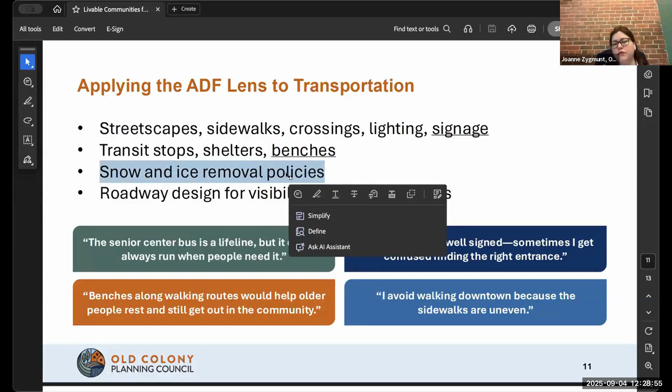So benches come up a lot—needing more benches on sidewalks or other major paths that people might be taking. Snow and ice removal policies—I know we've all got them in our communities. They become much more important if you're looking at a community through the perspective of age-friendly or dementia-friendly planning.

As you can see from some of these quotes: somebody avoids walking downtown because the sidewalks aren't even. Similarly, I remember in one of our focus groups, a woman said, 'I don't go out in the winter because everything's icy and slippery and not cleared for me.' So it really does impact quality of life for folks.

And then roadway design for visibility and slower speeds—I think that's an obvious and super important one.

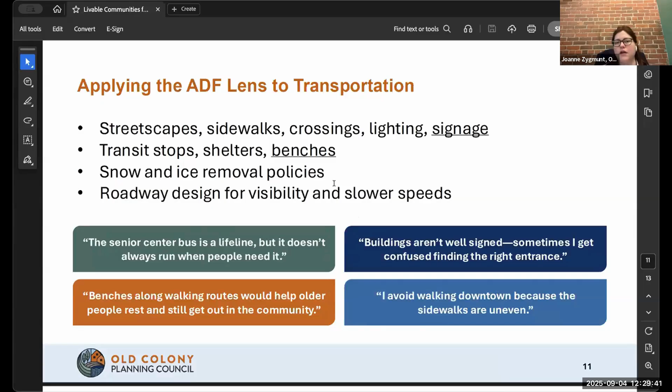AARP, and I'll include a slide at the end with resources, and the Dementia Friendly America organization have a lot of resources that help you look at transportation from these lenses. So we'll point you to those.

As I mentioned, what municipalities can do: aside from going through the process of getting AARP designation, signing the Dementia Friendly America Pledge, and putting together an action plan, many of our communities are moving towards dementia awareness training for municipal staff. For example, this is something that Duxbury recently offered to municipal staff, so they can recognize signs of dementia and know how they might need to respond to their customers, constituents, and residents in different ways to help them progress whatever issue they're trying to resolve.

Integrating age and dementia friendliness into planning, as I mentioned: you don't have to do a separate plan, but you absolutely should include it in all of your planning efforts. Doing a separate plan can also help with this.

Collaboration: we found in the communities we've worked in that sometimes the different municipal departments aren't necessarily coordinating with each other on transportation as a service. So the councils on aging sometimes work well with the DPWs, but sometimes when you talk to the two of them, their priorities might be different, and there needs to be better conversation there.

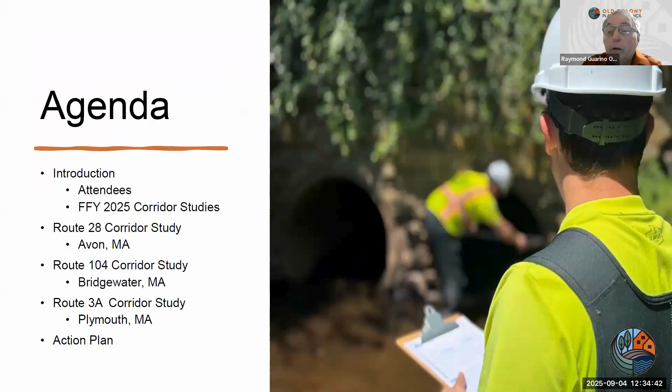Our agenda here is that we're going to talk about the three corridor studies. I'm going to talk about the Route 28 corridor study first. We're at the stage where we're coming to completion of these studies, and I'm going to give a brief presentation on the conclusions and recommendations on the Route 28 corridor study, and then pass it on to Kojong afterwards for Route 104. So I'm starting off with a summary of the TIP projects.

There's two TIP projects in the Route 28 corridor. The Route 28 corridor study consists of Route 28 in Avon, which is 1.7 miles, and we focused on the corridor conditions, operating conditions, and 7 key intersections within the corridor.

There are 2 TIP projects within the study area. The first one involves 2 intersections, Route 28 at Harrison Boulevard and Route 28 at East and West Spring Street. It's at 25% design right now. The other TIP project is corridor improvements from that point, from East-West Spring Street all the way to Randolph Line, and that is not currently moving ahead, although it's been approved by PRC.

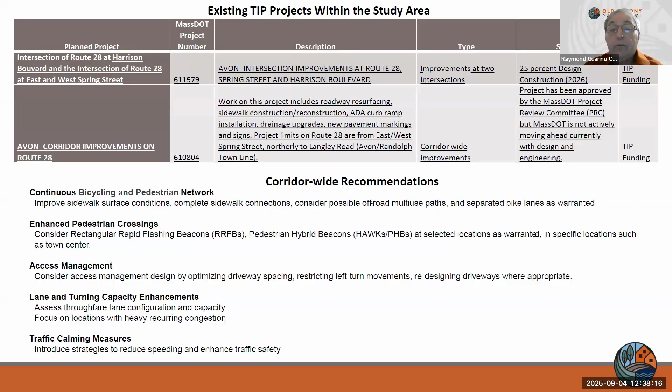So safe walking is very important for transit use, as well as for people using alternative modes instead of taking their car all the time. We found through our survey that on Route 28, a lot of people walk to the Walmart, and we can see worn paths along Route 28 where people walk into it.

Next, please. So I'm going to try to go quickly through each intersection, starting from the north. There were 7 key intersections that we looked at. The first 2 were in Avon Center. The first one was Main Street, Route 28 at East-West High Street.

At this intersection we found poor intersection alignment, and the yellow and all red clearance times are not adequate for vehicles to clear the intersection. There's emergency preemption, since there's a fire station in the downtown, but the emergency preemption is manual, not mounted on the intersection itself—it's actually in the fire station.

There are also long queues between the 2 intersections in the downtown on the northbound side, where people come northbound on Route 28, or from the West Main Street intersection onto Route 28 north, and there's a lot of weaving as they reach the Main Street at East High Street, West High Street intersection. This causes a lot of side-swipe and rear-end crashes during the peak hour as vehicles back up.

The other important issue at this intersection is that there is no protection for left turns on the northbound side, or for vehicles coming from East High Street taking a left.

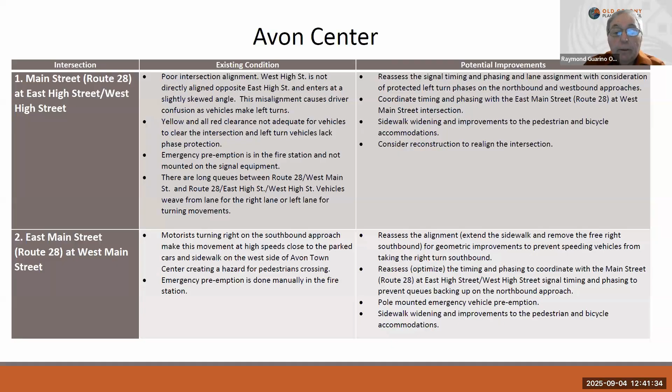So the improvements were to again reassess the alignment, extend the sidewalk—not remove the island, but extend the sidewalk—and remove the right turn to allow for a 90-degree right turn rather than having it cut inside the island close to the sidewalk. And again, pole-mounted emergency vehicle preemption.

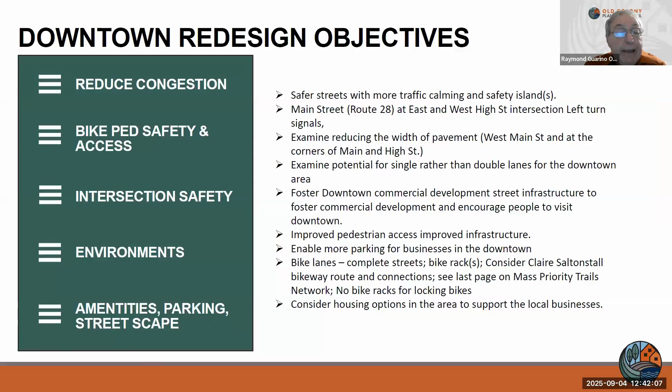Next, please. The downtown redesign objectives: the town had a consultant do a preliminary concept for redesigning the downtown, and the objectives were to reduce congestion, improve bicycle and pedestrian safety and access, improve intersection safety as I discussed earlier, and keep the parking while adding to the streetscape and amenity. Next, please.

And parking actually would be kept because on that side, on the west side of Route 28 in the downtown, there are businesses there that the parking is very important to them. Next, please.

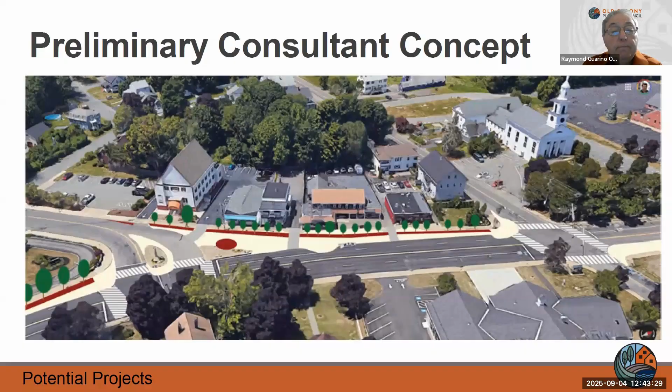The other 2 intersections as we go further south, East Main Street, which is Route 28 at East-West Spring Street, and East Main Street at Harrison Boulevard. That was the TIP project that's currently at 25%. The important issues at these intersections is that East Main Street and Route 28 at East Spring Street and West Spring Street used to be on the top 200 crash location list in 2021.

And the improvements that are going to happen is that it's going to be signalized, and that's going to be coordinated with the Harrison Boulevard intersection. They're going to reconstruct sidewalks and add bike lanes, a multi-use path along Route 28, reconstruct the curbing and improve the turning radius for trucks.

And again, the northbound approach is going to have an exclusive right turn lane because there's a lot of people that come from Harrison Boulevard from Route 28, and they're headed east, and they take a left turn onto Route 28, and then they take a quick right turn onto East Spring Street. So that's a very heavy move.

And then in the PM peak, it's kind of reversed in the opposite direction. They come from East Spring Street, take a left turn, and then they take a quick right onto Harrison Boulevard.

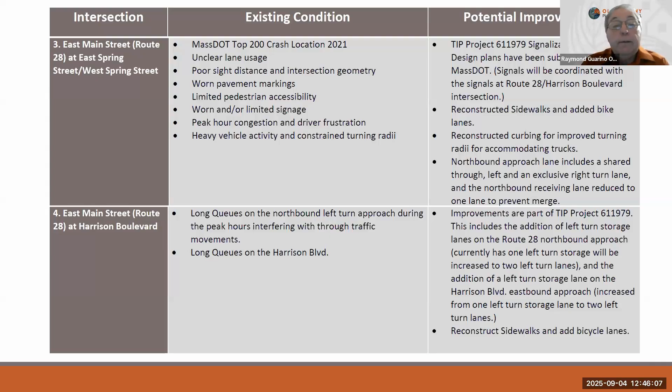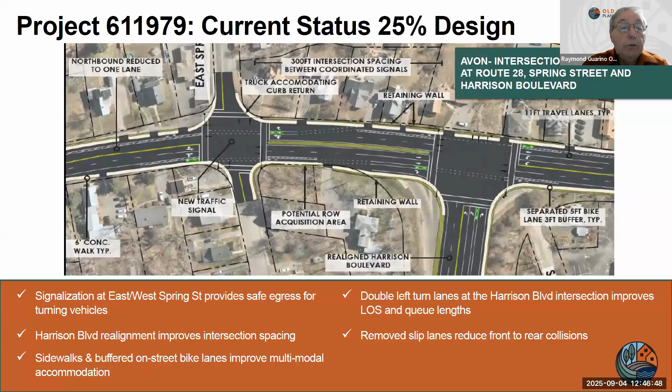And this is the 25% design. And the important things, as I said, were to coordinate, to add signals to East Spring Street and West Spring Street. West Spring Street will be actually made a dead end, so there's no cut throughs from West Main Street. And again, the two left turns from Harrison Boulevard and the two left turns on the northbound approach to Harrison Boulevard from Route 28, and the exclusive right turn to East Spring Street. Next, please.

And as we're going further south, the remaining three intersections that we looked at were Memorial Drive, Route 28 at East Main Street. Again, there's poor intersection alignment, poor visibility of this intersection. So as you're driving on Route 28, it's just south of Harrison Boulevard, you don't even realize the intersection is there. Again, missing sidewalk links, poor sidewalk conditions, and it lacks bicycle accommodation.

The improvements we came up with were to install overhead flashing beacons for intersection visibility, so people understand there are cars going in and out of this intersection. We also want to improve the sidewalks and provide bicycle accommodation, and consider implementing access management, because there are a lot of driveways that are unnecessarily wide, which adds extra turning movements and drives confusion.

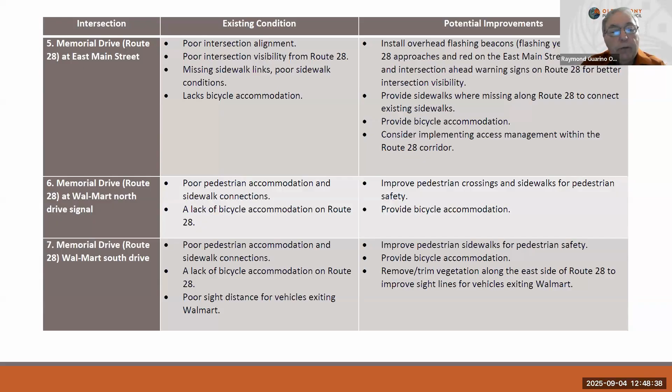As we get to the last intersection at Walmart, the signalized intersection operates under very good conditions, but there's very poor pedestrian accommodation and no bicycle facilities. The sidewalks that exist are in very poor condition. The Walmart also has another unsignalized drive that's right-turn-out only, but a lot of left turns come out of there, so they need to either sign it or put up a raised island so people can't turn left out of that unsignalized intersection.

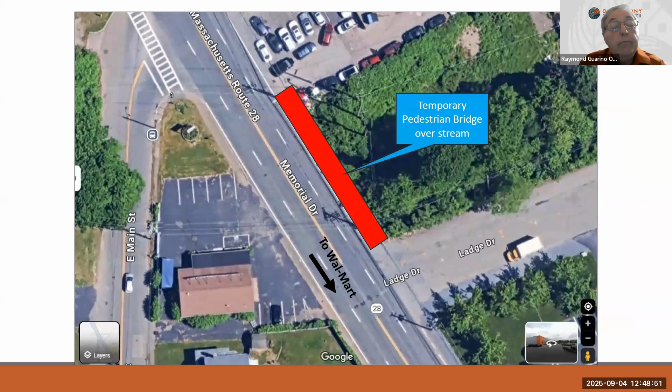Another issue we found is a culvert that goes under Route 28 at Trout Brook, at the East Main Street and Route 28 intersection, which is quite skewed. South of that, there's actually no sidewalk where that red block is, and that would be a good opportunity to put a temporary pedestrian bridge, because if you're walking along the east side of Route 28, there's a guardrail that pushes pedestrians into the northbound travel lane, just north of Ladge Drive.

We know people walk to Walmart because we can see worn paths, and our public survey confirmed that people do walk there. So that culvert area is a good opportunity to help get pedestrians over that part of Route 28 safely.

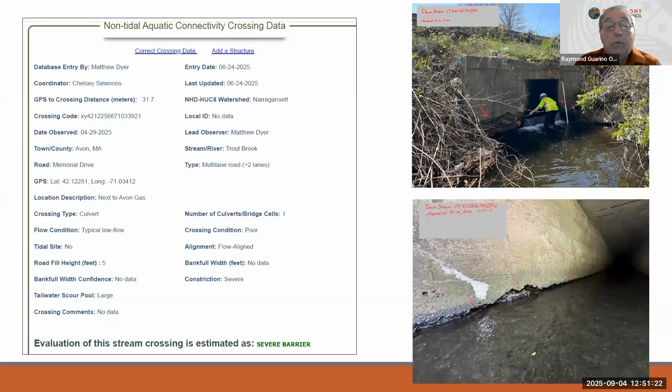So when they do replace this culvert, it's a great opportunity. Where that person with the measuring tape is standing, near the guardrail and the inside northbound lane of Route 28, they could widen that area and make it into a multi-use path for pedestrians and bicycles. It's a good opportunity when they replace that culvert.

Next, please. These are just some temporary bridge concepts. Before they replace the culvert, they can do something like this for the interim, so that when people walk along there, they're not pushed out into the northbound travel lane.

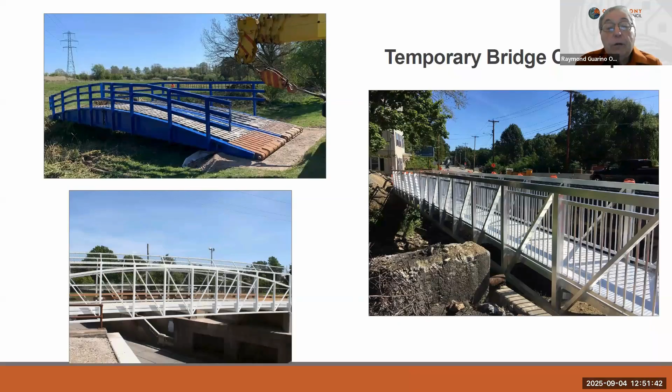Next, please. That's a quick, brief summary of the findings and recommendations of the Route 28 corridor study. If anyone has any questions or comments, we'll be glad to take them.

I could mention that our town planner, Rick Jordan, and I note the select board is going to consider sending a memo or letter to District 5 about the Ladge Drive sidewalk issue over that culvert you highlighted. That will be considered at tonight's select board meeting. That's great. Yeah.

If there are no other comments, I think Route 104 is up next. Thank you. Yep, thank you, Ray.

Hi, everyone. My name is Guoqiang Li. I'm helping with the Route 104 corridor study in Bridgewater. Next, please.

Before I start, I just want to express appreciation to MassDOT and the town of Bridgewater. I recognize Shane and Barbara here. Thank you for your dedication and support, from data collection, analysis, and preliminary findings, to implementation reviews support. So thank you.

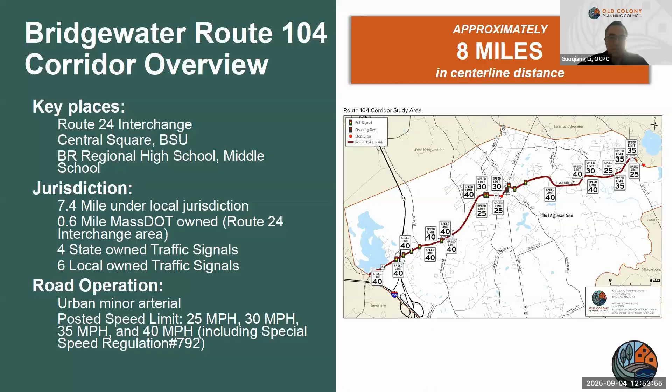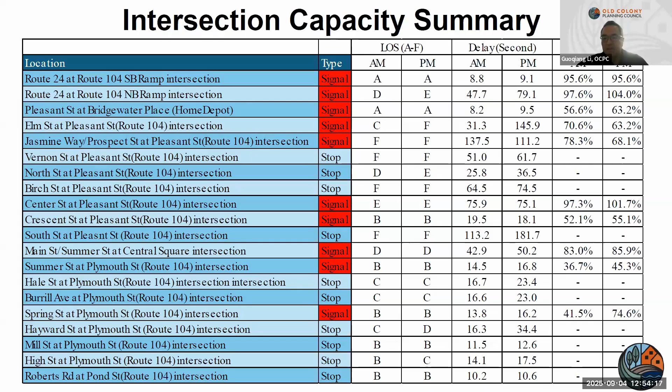So we use a Synchro traffic modeling and simulation tool to identify the congestion issues. This is simply a list with all the output. We identified a couple of locations that are operating over capacity, as well as the delay estimate and intersection capacity utilization percentage. This will also be included in our draft report.

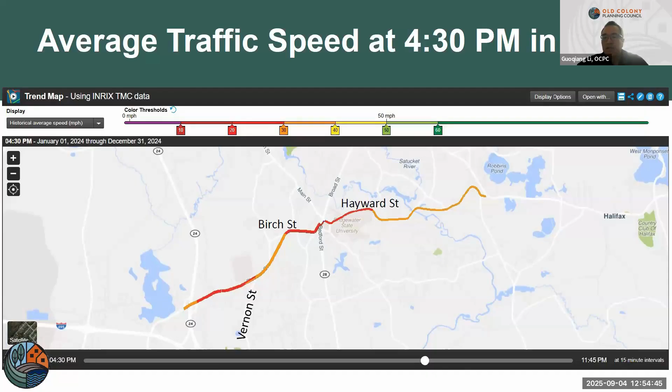We also used enterprise data platforms, such as INRIX data, to identify any recurrent traffic congestion patterns along the corridor. We found that the portion east of Route 24, west of Hayward, constantly operates under level of service F during the AM and PM peak hours.

As a conventional transportation corridor study, we also include detailed safety analysis using collision data. We analyzed over 20 different locations to understand how the collisions occurred, the type of collision, severity, and the year, trying to understand the pattern and changes over a longer time period.

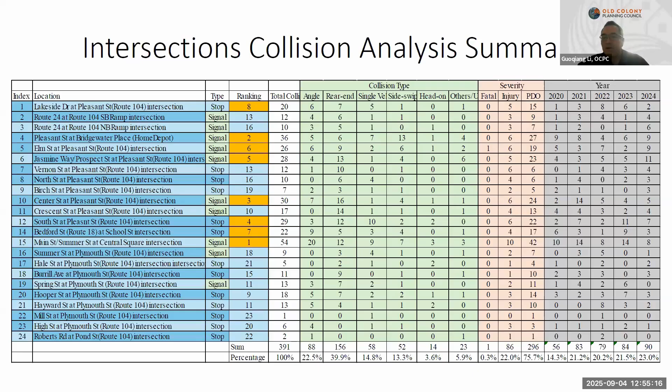Multimodal transportation planning is one of the key findings and processes for the corridor study. There is no bike and pedestrian system along Route 104. Our findings include sidewalk availability, connectivity, and accessibility for bike and pedestrian activity.

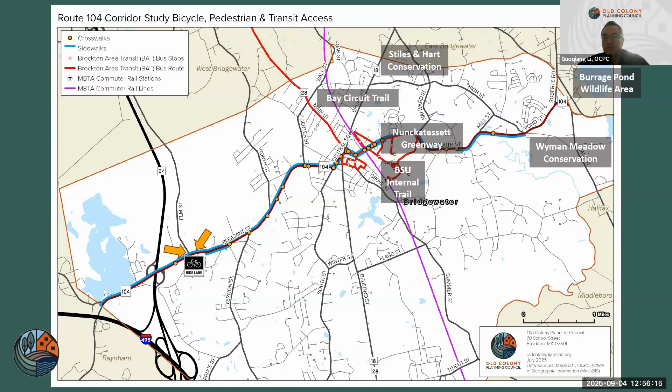One thing I want to point out is we identified several key destinations for bicycling activities, including the Nunckatessett Greenway. Route 104 in Bridgewater is also home to BSU, so as you can imagine there's a lot of bicycle activity, as well as the MBTA line crossing Route 104. Those are the areas we're focusing on for recommendations for future improvements.

In general, we believe multiple things could be done throughout the corridor as a system to improve safety and bicycle and pedestrian use, including a continuous bicycle pedestrian network. We are in the process of forming a plan for any on-road or off-road bicycle facility.

At individual crossings, we do not see a lot of safe accommodations for pedestrians crossing Route 104. We looked into options such as rapid flashing beacons and Hawk signals, those kinds of elevated, safer crossings for pedestrians.

In terms of access management, it's a big topic. We will also choose locations that we feel have higher priority and should or could consider improvements, such as spacing of driveways, curb and radius improvements, and other similar items.

We're also looking at individual intersections to see how we can improve capacity, such as adding a turn lane where warranted.

Traffic calming: throughout the corridor study field audit, it's clear that in a lot of areas vehicles are driving at high speeds that are not safe for smaller-scale road users. Speed management could be another option for consideration.

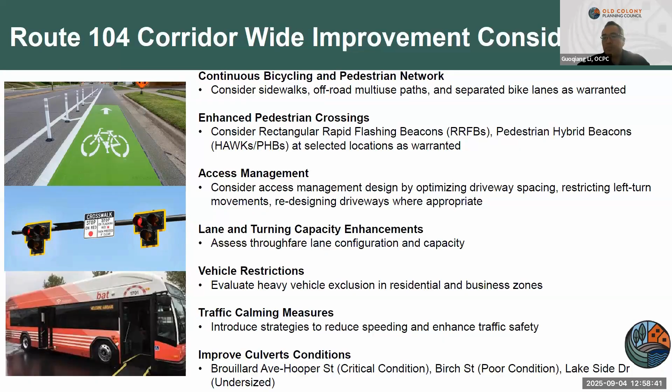I just outlined the major intersections needing improvement, so I'm not going to go through all of those.

In general, we included public opinion and worked with the community to identify key locations and what kind of improvements could be made, including geometric improvements, signage enhancement, and any operational obstructions along the sight lines, which we're going to include in the report.

This is also another extension showing the top 10 locations that will need short-term or mid-term improvements. I'm happy to answer any questions.

When was the intersection of Elm and Pleasant Street last redone? It looks in fairly good shape from Google Earth.

Thank you. If you go back, Sean, could you go back to the table? So Elm Street was improved very recently, a few years ago — thanks for your comment. Through our study, it looks like at Elm Street there is a congestion issue, recurring congestion issues, in the PM.

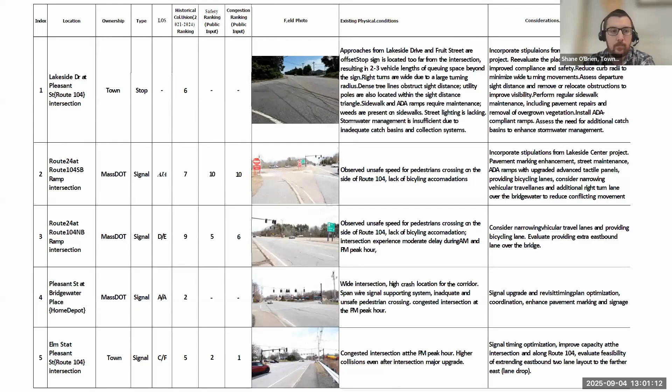I just also want to point out a couple of things we are trying at OCPC. We use drone flying technology and dash camera recording of the corridor. There are a lot of great things we can offer for these corridor studies.

And to follow up on the Elm Street intersection, I just took a look at Street View, and it looks like it was done sometime between 2019 and 2021, according to the imagery that's available.

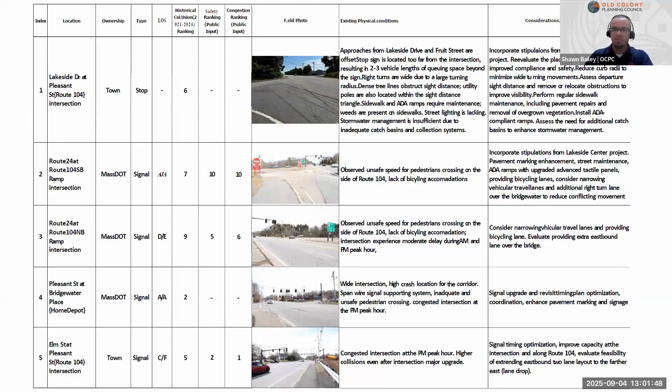I know we're running a little behind schedule, but just like the other two studies, this one is wrapping up and we've developed a draft report. We're moving ahead on presenting these. We've already met with MassDOT to present our draft findings, and we'll have a public meeting in Plymouth in a couple of weeks. This shows the study area.

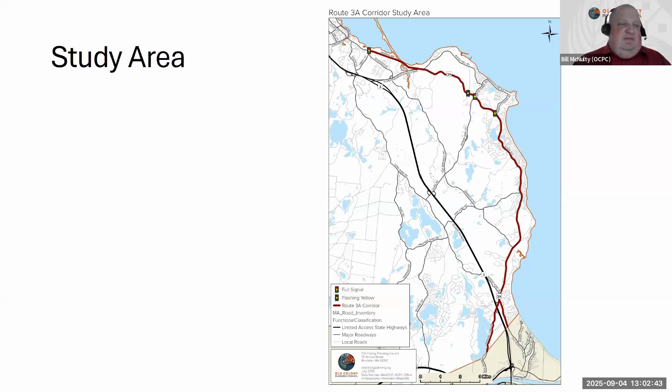You can see it's a large area, Route 3A, in the southern part of Plymouth, running from Center Street on the northern end all the way down to the Bourne town line. We also covered the spur of Herring Pond Road that comes off of 3A and also goes down to the Bourne town line.

In the initial consultation with the town before this corridor study even kicked off, the first thing brought to our attention was a concern for vulnerable roadway users, particularly pedestrians along this corridor. A lot of pedestrians are crossing the roadway in a couple of coastal zones, the Long Beach area and the Pilgrim Beach area, as well as walking in the roadway at points where the sidewalk isn't great and perhaps not even existent.

This was an immediate concern, and when we did our public outreach, we got over 400 responses, and overwhelmingly the number one concern echoed the town's concerns of pedestrian safety. So that immediately became the focus of this corridor study.

When we looked at the crash history, there wasn't a lot of existing crash data that would have jumped out to us as alarming. But when we looked at the overall land development pattern in that area, as well as existing traffic conditions, particularly traffic speeds, and applied the safe systems approach, we immediately identified multiple areas along this corridor that we'd call high risk for serious injuries and fatalities to vulnerable roadway users. That became the focus.